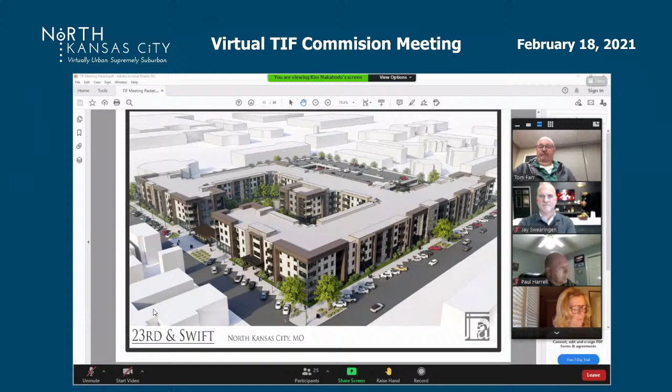Well, again, my name is Kurt Thuenemann. I'm with J. Price Architects. Good evening. I too want to thank Sarah in North Kansas City for all of their assistance on this project. This evening I just want to spend a few minutes presenting the overall design for the 23rd and Swift project. For our part, we carefully reviewed the Northgate TIF exhibit, primarily exhibit number 9, architectural design review guidelines, and all other city requirements as the basis of design for this project.

Currently, the project subject site is a vacant 6-acre site on the south edge of the Northgate development. For our design, can you share the floor plan that shows the amenity space and the garage?

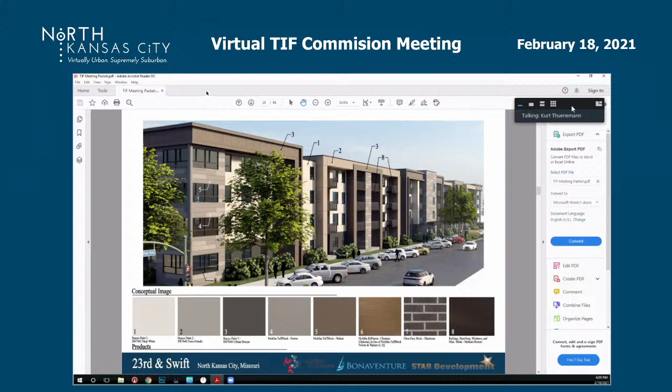And then we have various perspective views, if you want to slide through some of those that we provided. I think it's going up - there you go. Yeah, that's perfect.

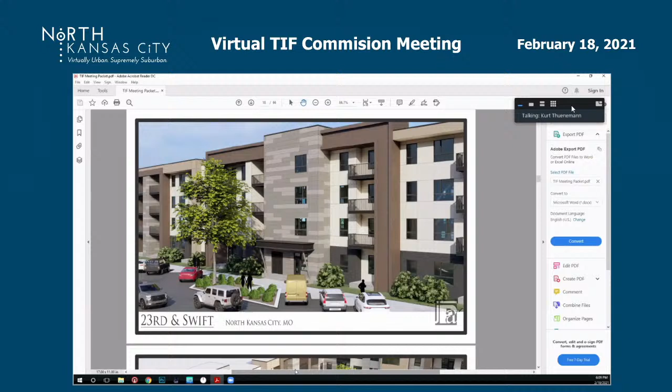This particular view is an entrance to the building. We have 3 of them located on the north, south, and west side of the building. The view right below that shows a connection between the 3-story parking structure in our development and a pedestrian bridge. And then I think there's one more view of the front showing the entry.

One more up, please - there you go, perfect, thank you so much. This view is the main entry off of 23rd Street. This is where our leasing office will be, along with our interior amenity space. This gives you a pretty good idea of what the totality of the project will look like.

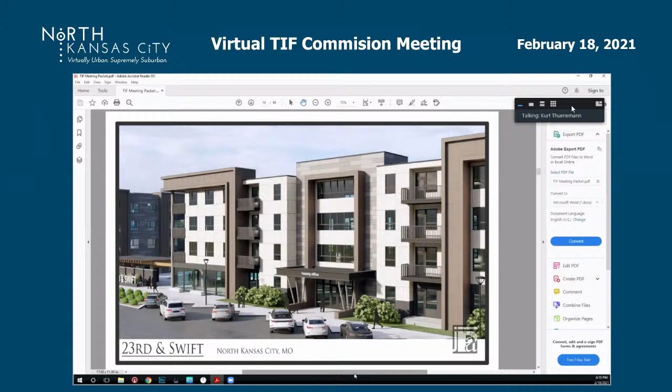In addition to this, we've also included a site plan. On this site plan, it shows perimeter parking on 3 sides of the building - the north side, the west side, and the south side. There should be one more sheet that shows more of the civil drawing.

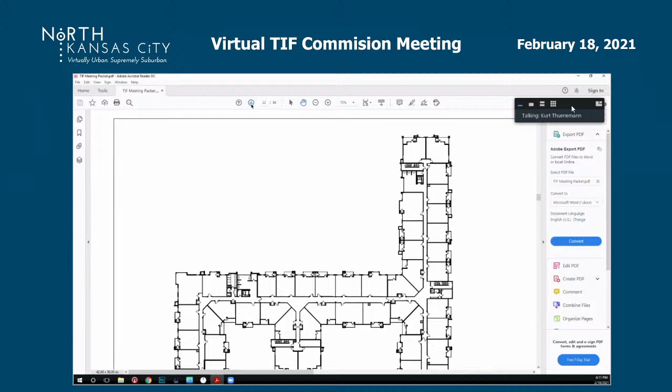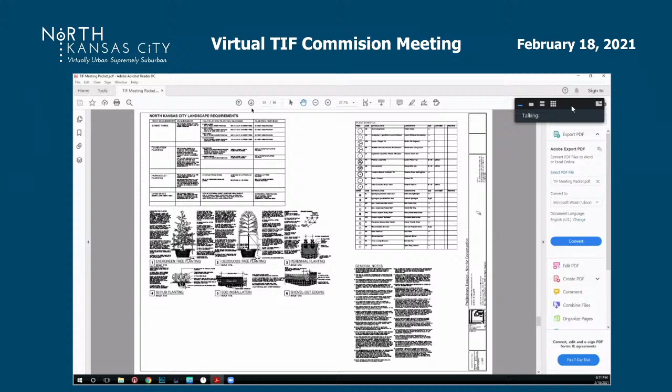The full civil plan is on page 54, Kim - sorry, 55. Oh, thank you so much.

So again, we have angled perimeter parking around 3 sides of the building - north, south, and west. We have parallel parking along Swift on the east side. We've also incorporated bike lanes along Swift and 23rd Street. In addition, we have a full site lighting plan and landscape plan incorporated into this package.

All of these items have been reviewed and vetted by staff and the various engineering departments for their approval. We've worked with staff over the last 8 or 9 months to get to this point, and we're very excited to bring it to North Kansas City and the community. This concludes our presentation, and we're available to address any questions or concerns. Thank you so much.